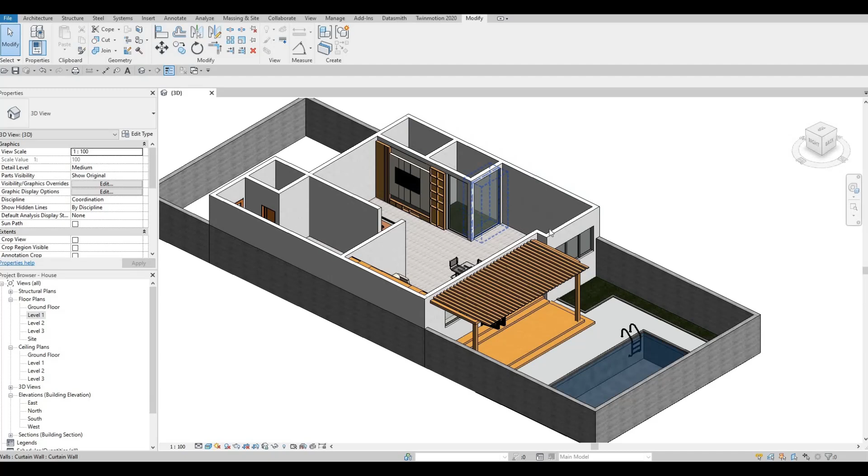So in the last video, we were able to create the pergola. We added some windows and we added all the mullions. Now we're gonna continue working on this. We want to start by creating our kitchen.

So now let's go to level 1, and here under our level 1 I want to move our section on this side, and then I want to flip them as well so that we'll be able to see what we're working on. So I'm just adding it here and I want to see everything.

What I'm planning to do is to have basically an L shape. Fridge will be on this side, L shape. We have cabinets on top of here, but not on this side because we have some windows right here.

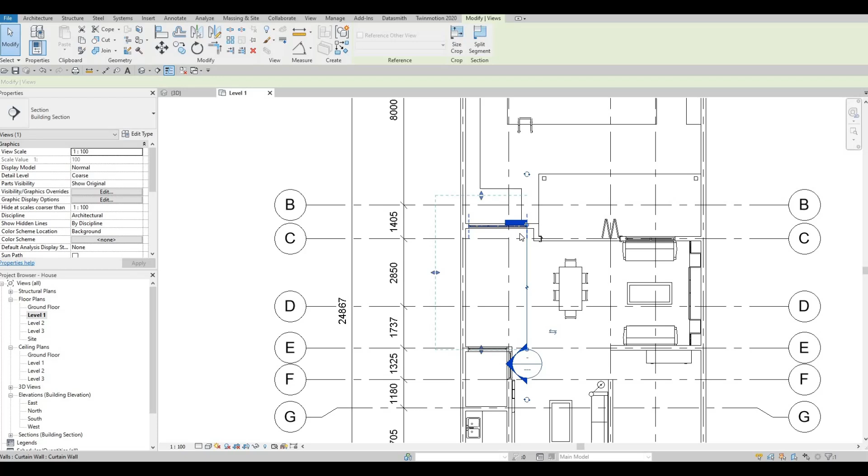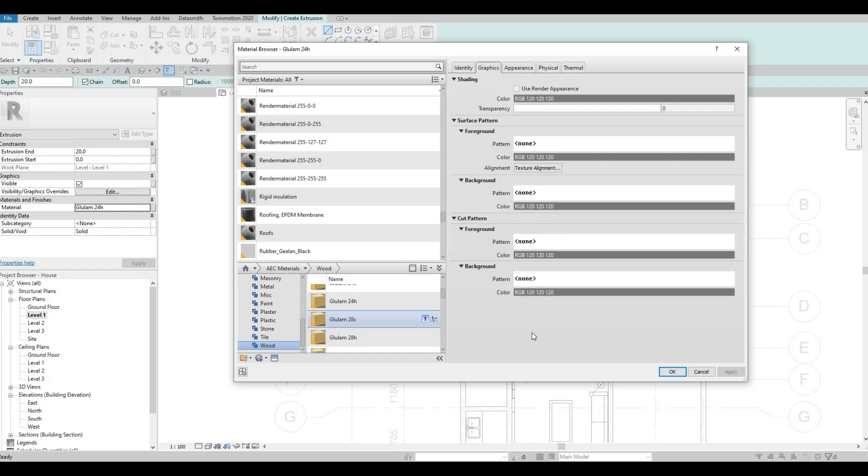So something different. So now let's go to architecture, drop down component, model in place, and then select generic model, press OK, and then OK. Click on extrusion, and we want to set this to a wood material, a different wood material. So here, let's choose one of these materials right here, 28C. Click apply, OK, and then we're going to create the base.

Here, let's set this one to 875, and then let's add an L shape right here. I'm gonna set this to around 600, and then I want to make sure to maintain all of that. So this one should be around 600 as well. I want to see 650.

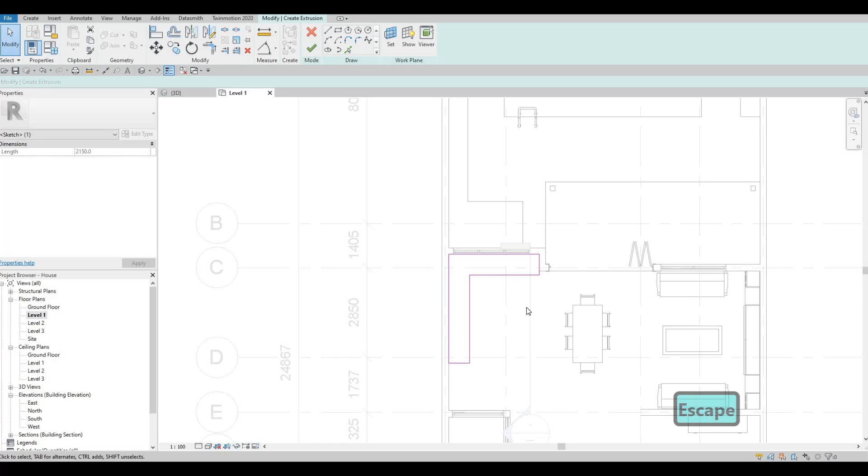I want to set this to 650 instead, and then trim and extend on both sides, and then delete those remaining right there. So 650 and then 650 on this side. So I'm happy with that. And then after that, click on finish, look at it in 3D, and it will look like that.

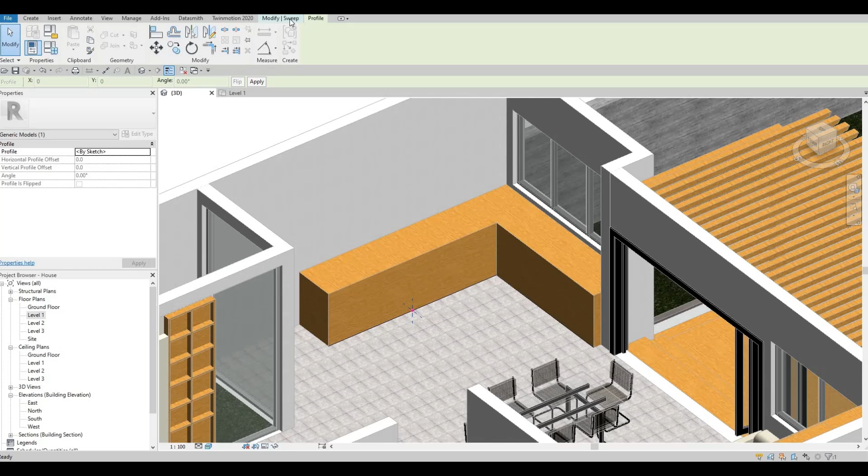Next thing we're gonna do is we're going to add our kick plate. So we're gonna use a void form and then sweep. Pick path, select here and select here. Click on finish, and then click here again, edit profile, and then select this rectangle.

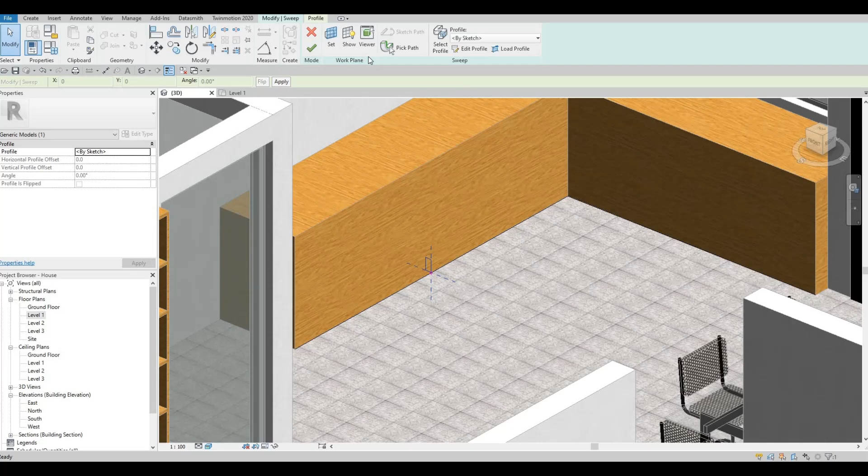We're going to put this one right here. This one is around 50, and then this one, make it 100. So that's our kick plate. Click finish, and then go to modify again, and then click finish again, and then click on cut geometry. So now it's cut. As you can see right there, we created our kick plate.

Next, I'm going to go back to level 1 and select this to add in our top. So here I'm going to select extrusion, set, and then once you click that, we're going to add, so I'm going to use pick line, and then after this I'm going to set this to 25, and the material should be a stone material.

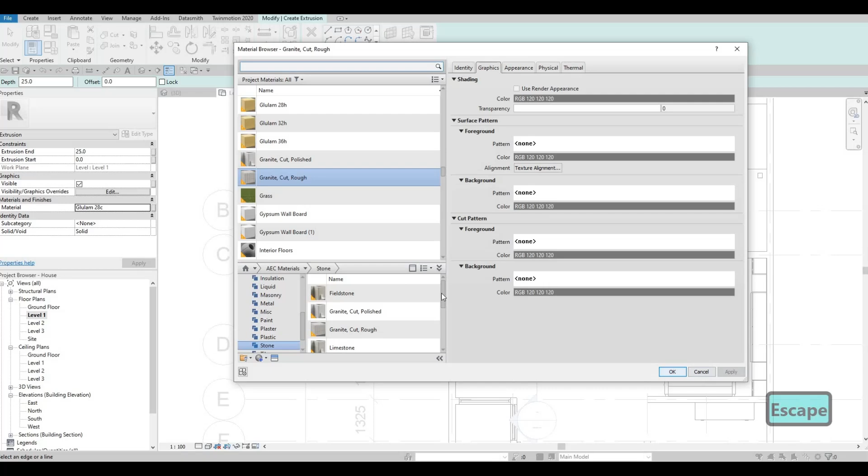This one we already used, so I'm going to use this one. Click there, and then as you can see, I need to set this one properly again. So edit, pick a plane. I'm going to use this plane. There we go. And as you can see, we have our countertop.

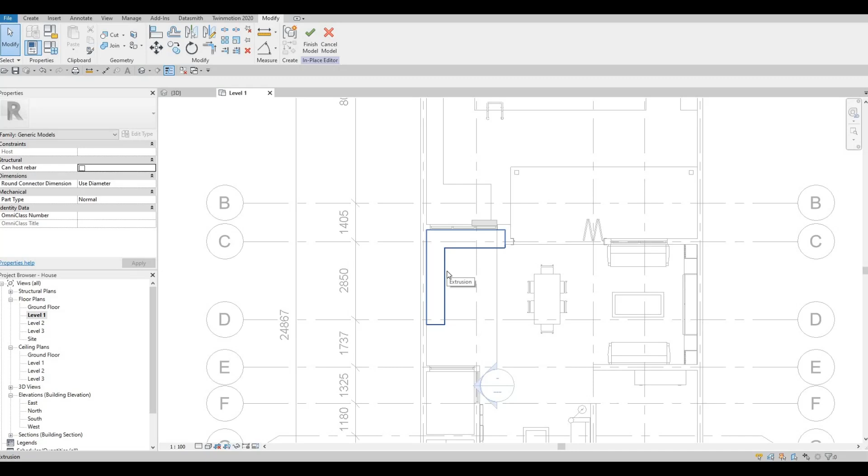And then next thing we're gonna do is we're going to add the sink. So what we're gonna do is go to insert. So before we do that, let's click on finish first, and then we could edit this later on. So here, go to insert, load family,

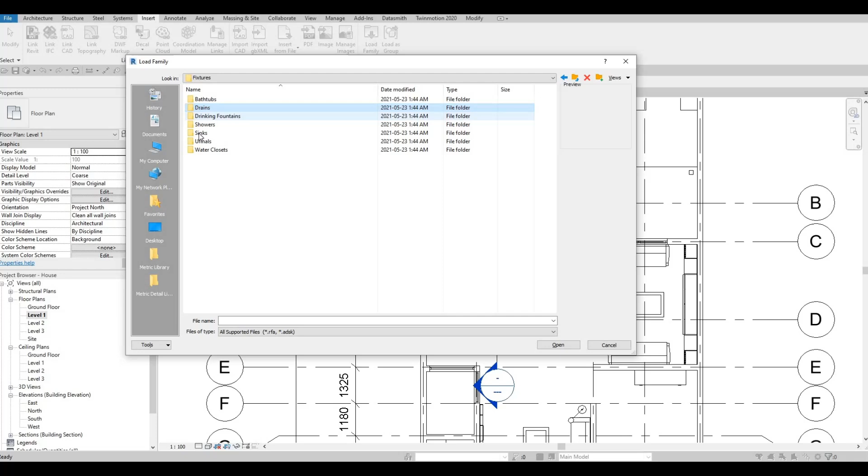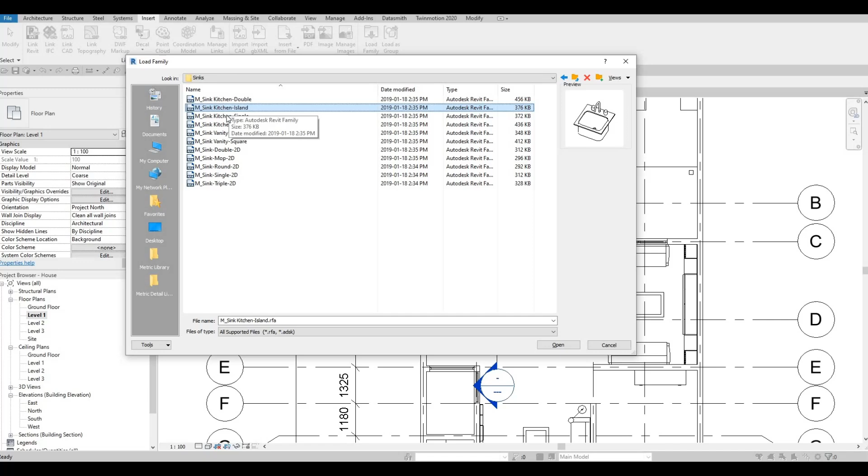and then here we're going to go to plumbing, architecture, fixtures, and then select the sink, and we're gonna choose one of these. And then I'm gonna choose this one instead, or maybe the one for the island. So just a small kitchen. Oh no, I'm gonna choose the single. Click on open, CM, and then I wanna select it on this side.

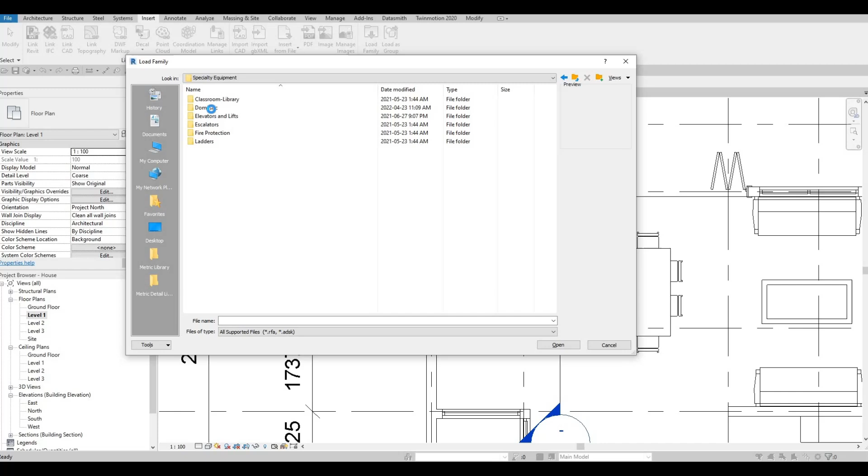And since we're here already, let's add in some of the furniture or equipment. So specialty equipment, domestic, mid-range, and we're going to add in the fridge.

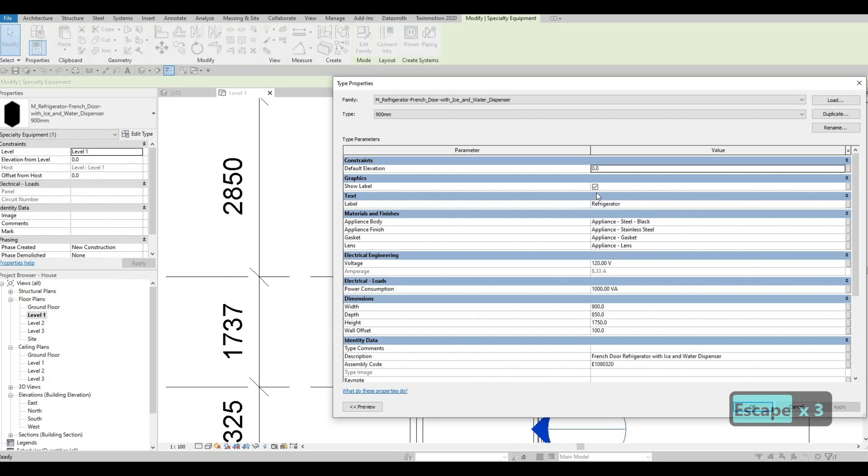So I'm going to use this, click open, type in CM to add it instantly. And then here, I don't want my label to show. Click apply, okay. And then let's align all of this, AL. Let's move this first so that we could align it properly, AL, and then align it there.

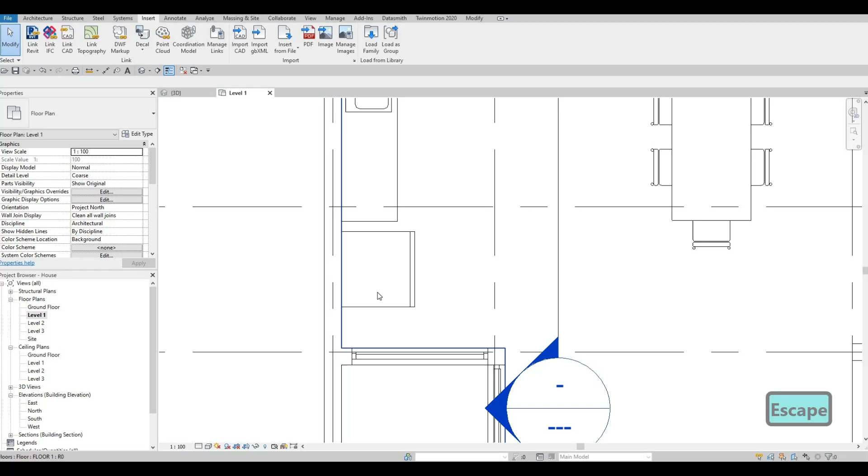And of course, we're going to create a case here. So actually, we shouldn't align it. Let's just align it at the back, which it's already at. So I'm gonna create a case here for this. But I want to change the depth to 650 as well, so that it looks nice enough on this side. So we have enough space,

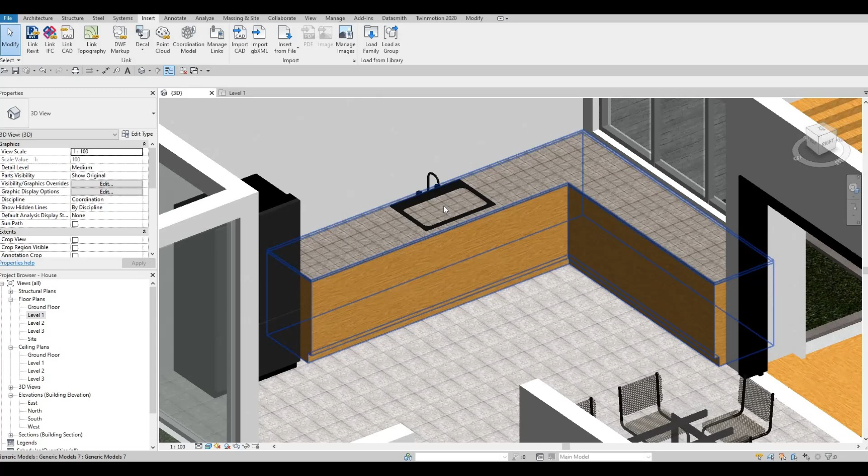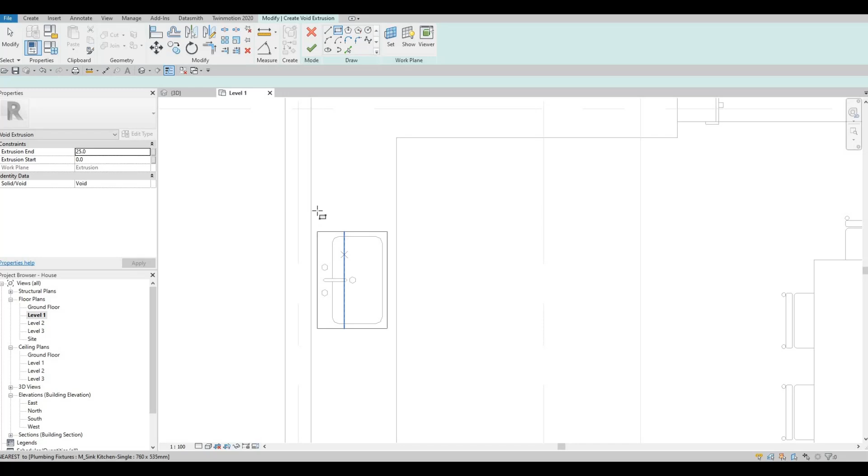and we still have this one still visible. So as you can see, we need to void this one as well, because right here we need to edit again. So go to level 1, edit, and then here we need to void extrusion so that we can see the sink here. So rectangle, we need to set it, pick a plane, and then let's select it right here. After that, let's just give it some space like this.

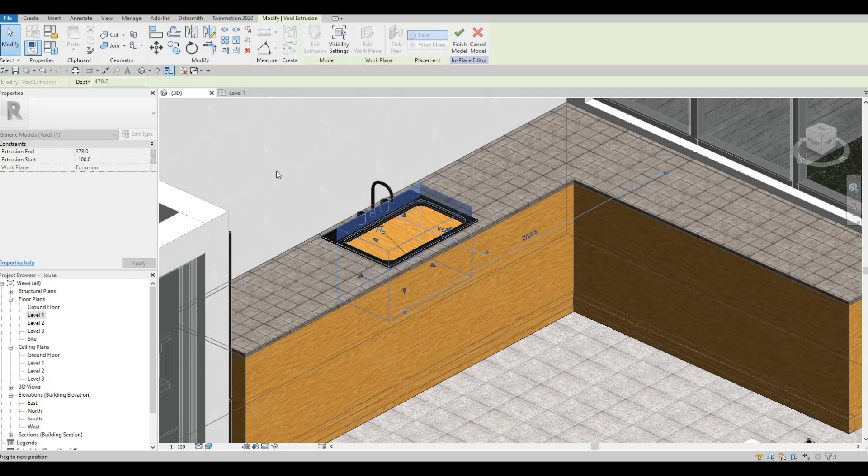I want to make sure that I don't touch this because I don't want it to be flashing. And then here, as you can see, we have our extruded part, but it's not extruded too much. So I'm going to extrude it going down so that we could see this one. So cut geometry, and as you can see, it's showing now. So that's how you do it, like that. And then we're going to create an island. So that's the last thing that we're gonna do.

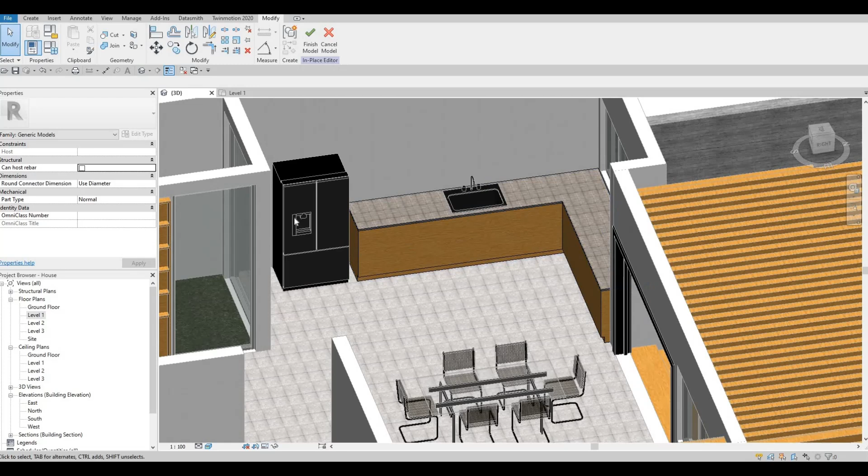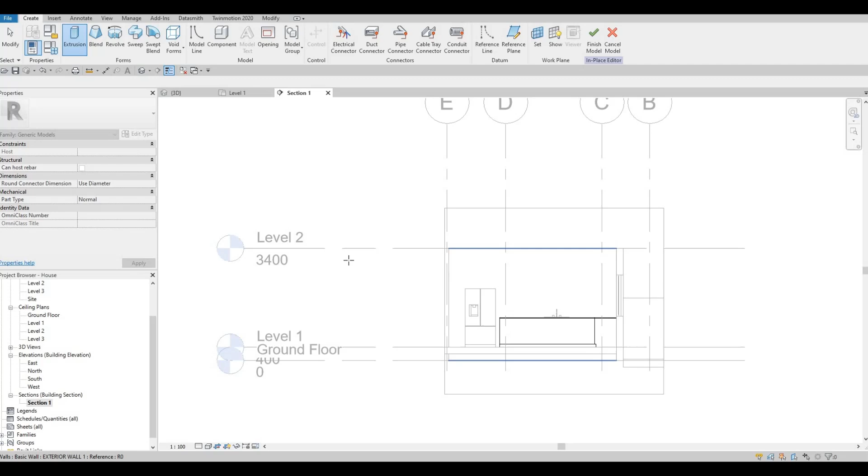What I'm gonna do next is to maybe add something right here. So let's do the section. I want to make sure that we have the section open, and here let's create an extrusion, pick a plane, and then select this wall, and then here we're going to change it to a different wood material, maybe 36C. Apply, okay, select this one and create an opening right here.

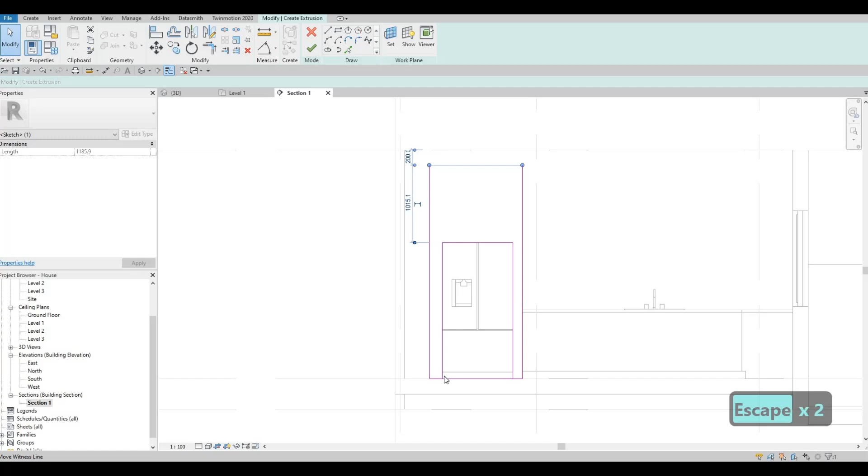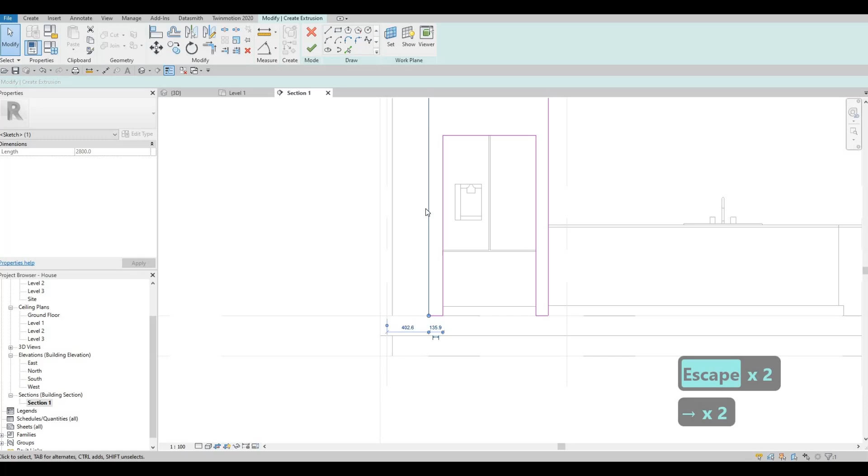And then this one should be all the way to 2800 only, so that's perfect. And then delete this, and then SL on this, and then TR, trim and extend. Click finish, see it in 3D, and then let's just push it out like that. And then let's go to level 1. I want to see how it looks. So it looks good.

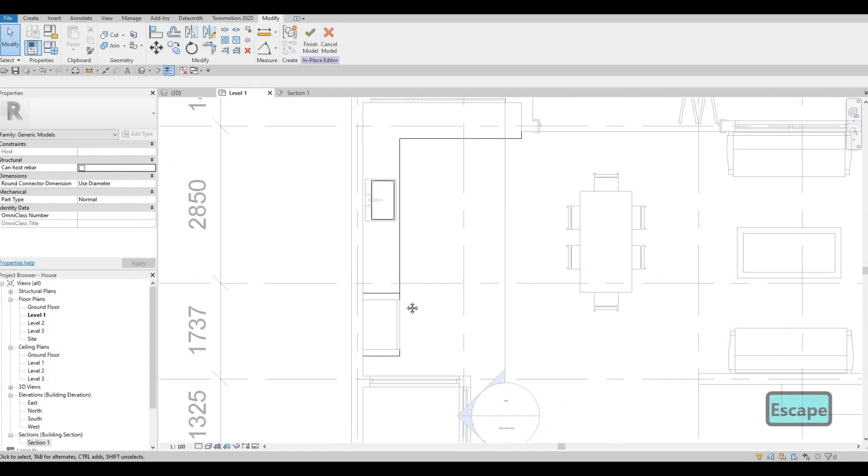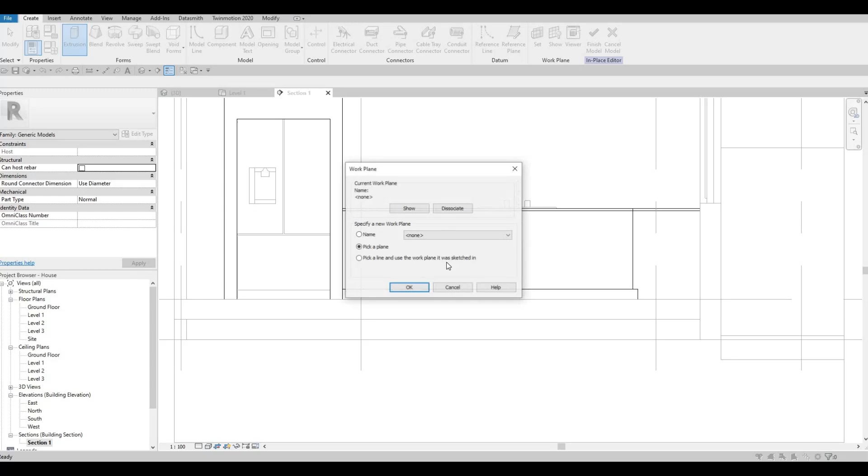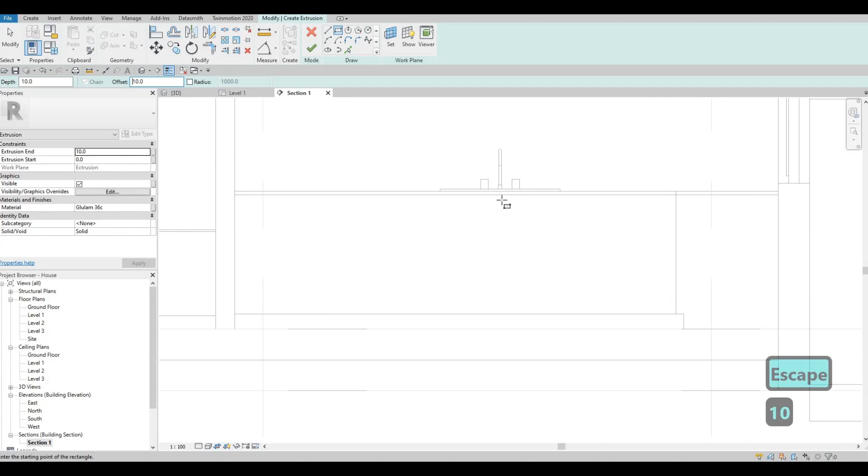And here we need to add our cabinets. So I want to see what material we'll use here. See, Control C, go to section, and then let's start adding those ones. So here I'm gonna click on extrusion, pick a plane, and we're gonna select it here. I want to have an extrusion of only 10 because it's just the kitchen door. And here I want at least to offset this to 10 as well, so that we have some gap going inside like that.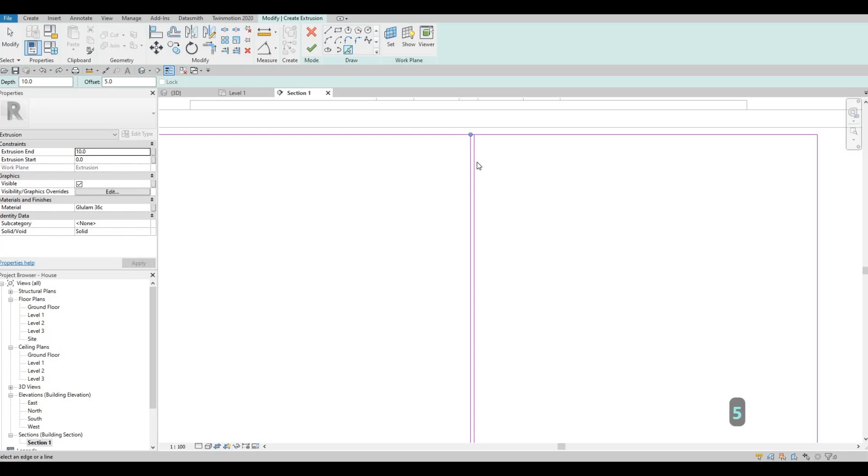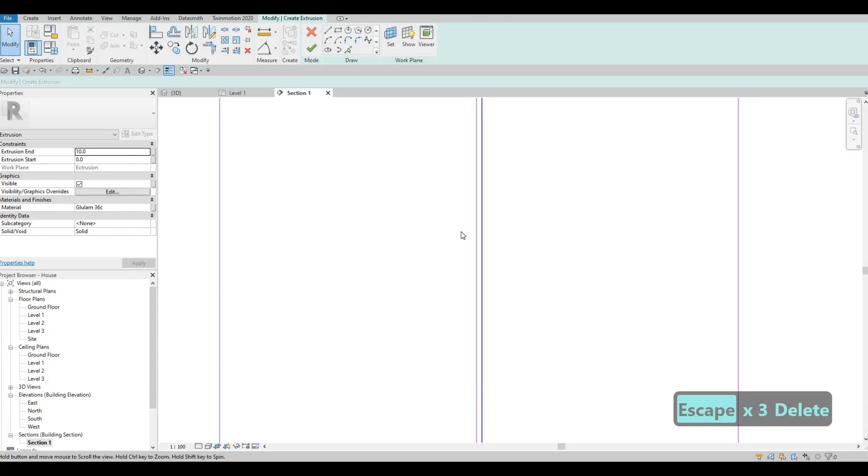And then might as well mirror this. And then here we could just move this one, or just delete or offset this to 5, and then delete the one in the middle, and then another one. So we have those that we could create SL on that, and then SL right here, trim it. This one should be deleted, and then trim it again here, and then delete this part. So now this is looking good.

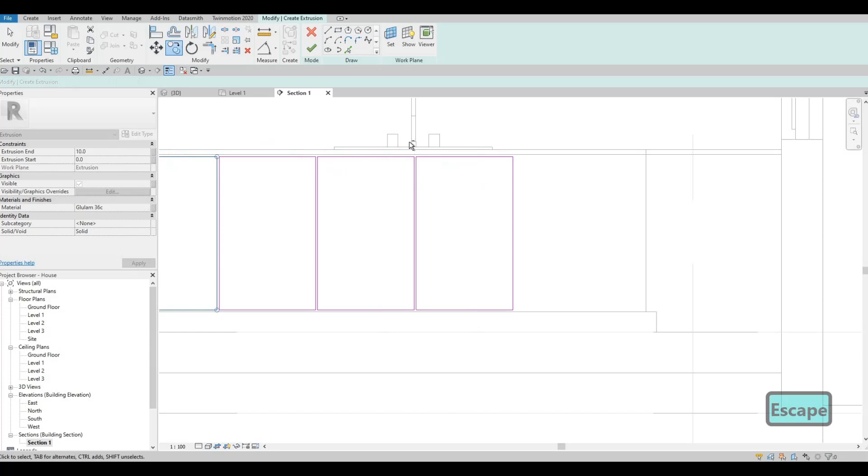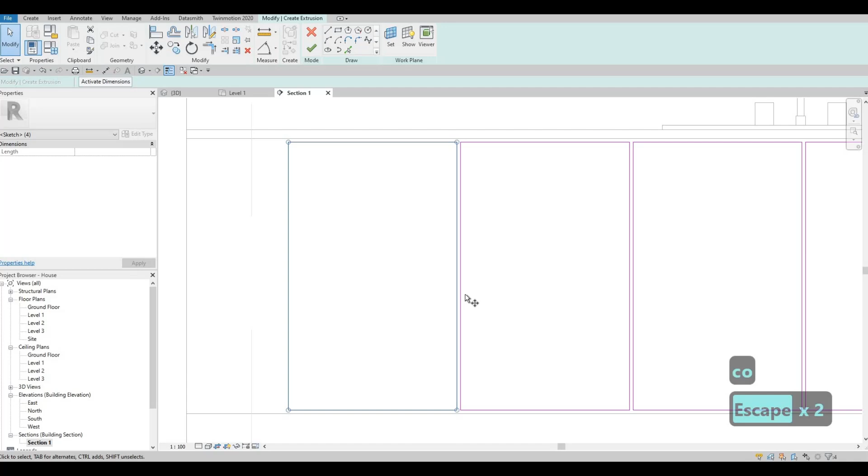We just need to mimic the spacing, copy it, and grab it from the corner. And then we're gonna do it on this side as well. CO, grab it there, so that we don't need to keep on creating the split element. CO there, I don't want to touch that, so CO, grab it there, and move this one. And you want to make sure that you have the correct spacing.

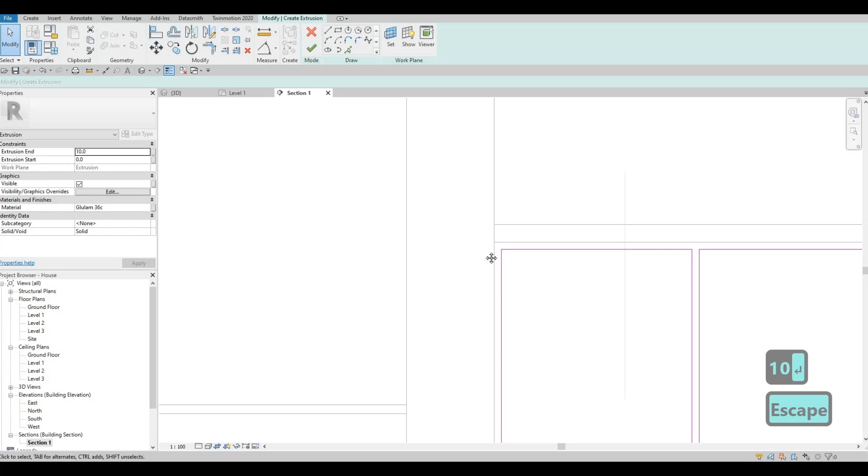Let's use this, and then put 10. So that's good on that side. And how about on this side? Let's fix this as well. CO, and let's add it on this side as well. Obviously, it's not all hinge doors. We have drawers as well. So might as well add those drawers as well right here.

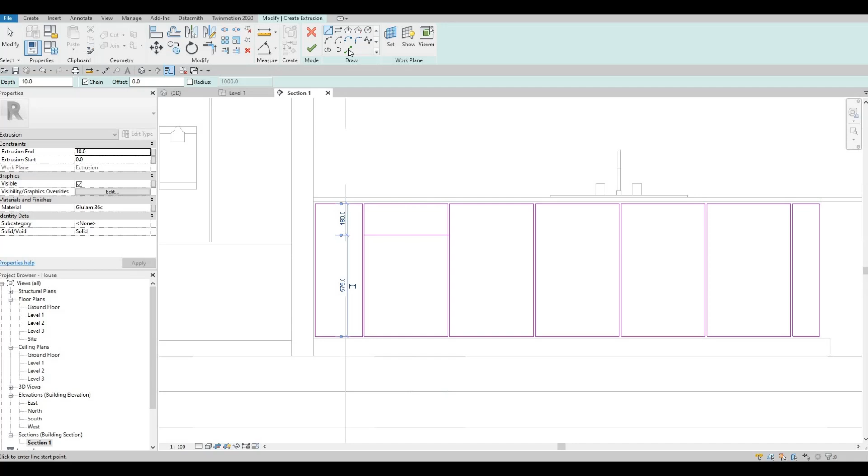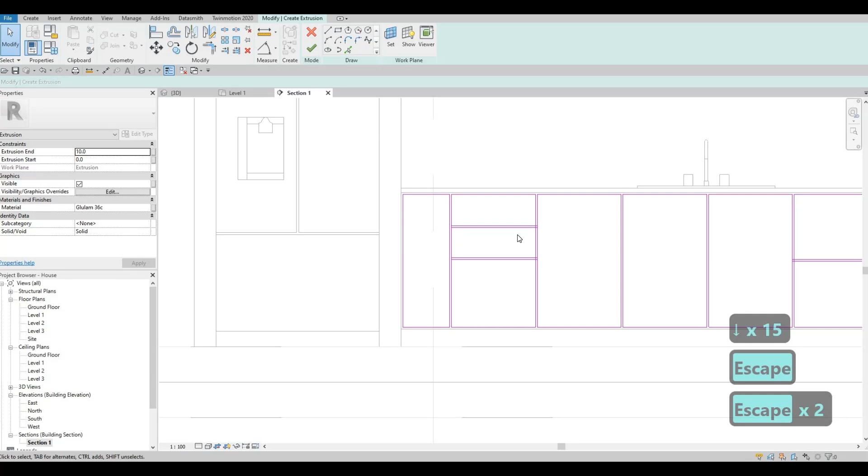Offset it to 10 and copy and grab it. Put it on this side, so to change it a bit, make it equal at least. And then now SL, and then SL. You just need to split it, and then TR, trim and extend, unjoin them. So this one we need to SL as well.

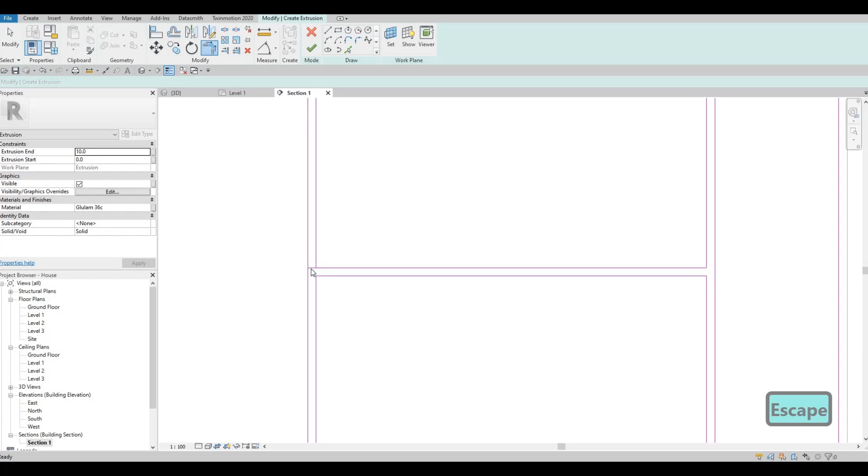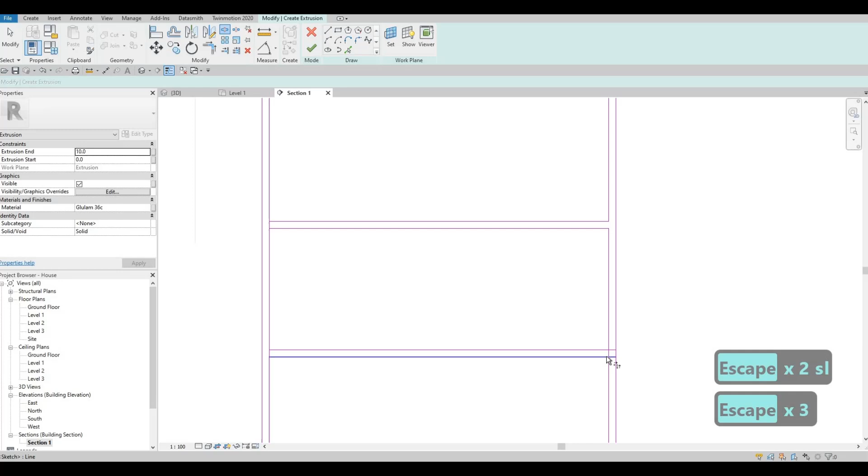This one is an extra, so we could just delete. Trim and extend. We need to SL on here, and then this will be extra. Trim and extend, and those are extras. This one's good. Okay, and then now Glulam 36. See, that's fine. So we're gonna do that on the other side as well.

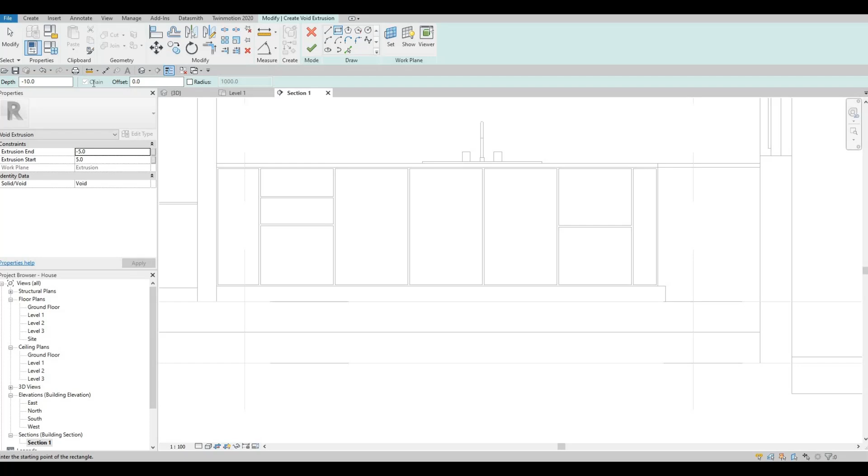Go to 3D, and we have something that looks like this. I want to add more detail, so what I'm gonna do is select that again, right here, void form, void extrusion instead. Pick a plane, I'm gonna choose this plane, and here I'm gonna put -5 and then 5, and then here we're going to offset this to around 50 and just simply add this information right here.

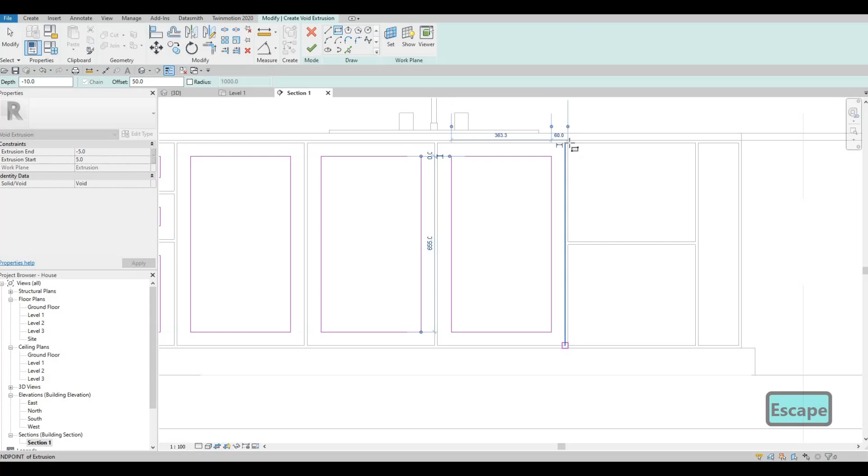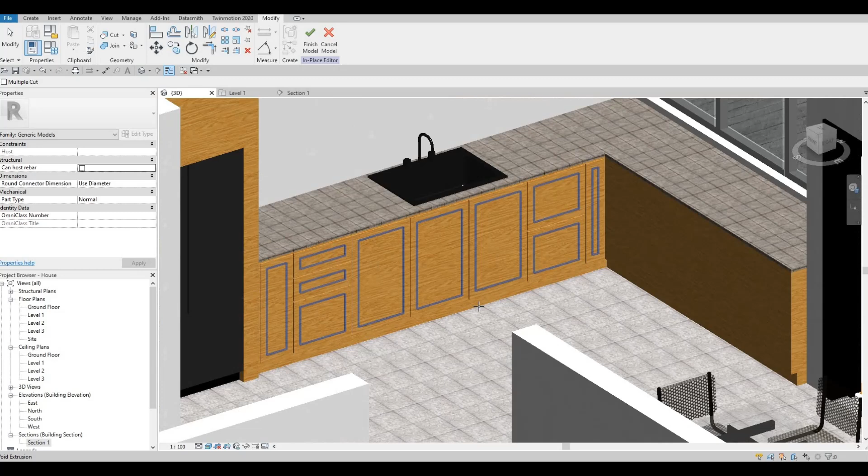This one will make it look really good and look really modern. Click on finish and click on cut geometry, and as you can see, it really looks good. Simple, but as you can see, a big impact in the way the kitchen will look.

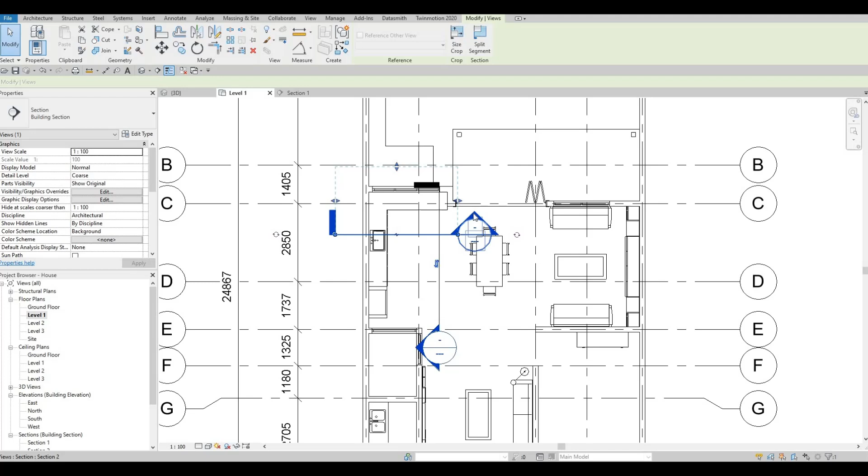So next thing we're gonna do is just click finish, because what we can do next is go to level 1 and add another section here so that we could see it much better. So I'm going to flip this on this side, change the view range, and then just double click so that we have our section 2 right here, and we could just move this one on the side.

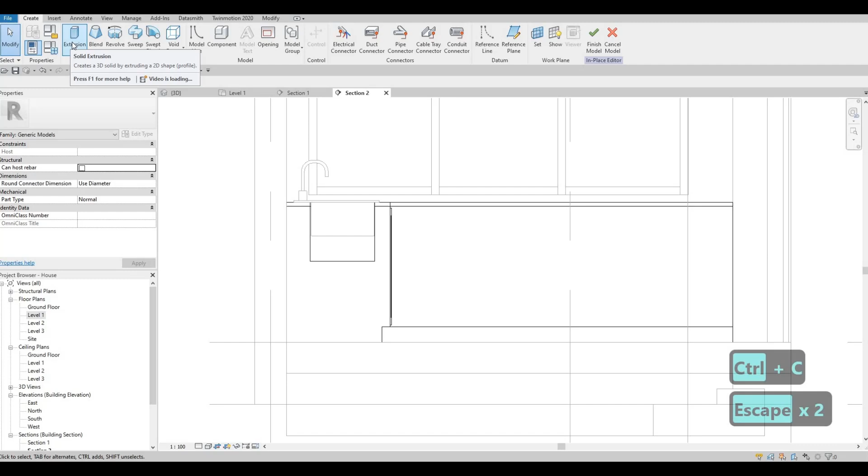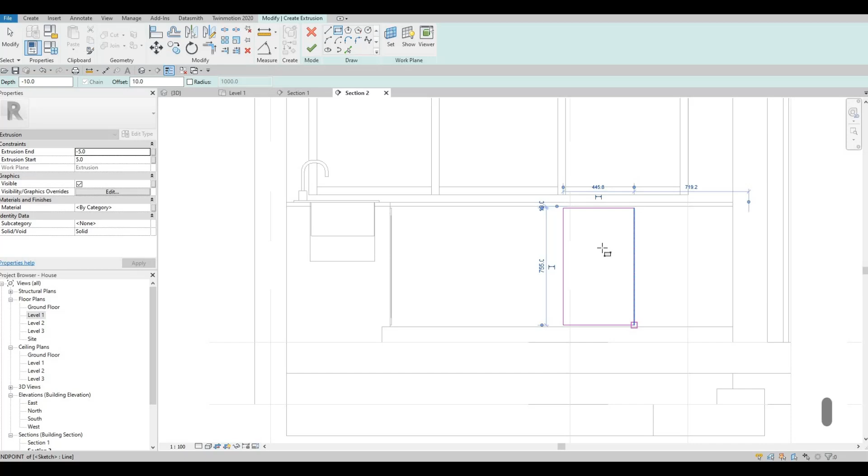So now I'm going to select this, edit. We have Glulam 36, so I want to make sure this is the same material that I'm gonna use. Click extrusion, pick a plane, and what I'm gonna do is click right here, select, and then offset this to 10, and might as well put it in the midpoint, flip it, and I want around 450 instead, and then copy it,

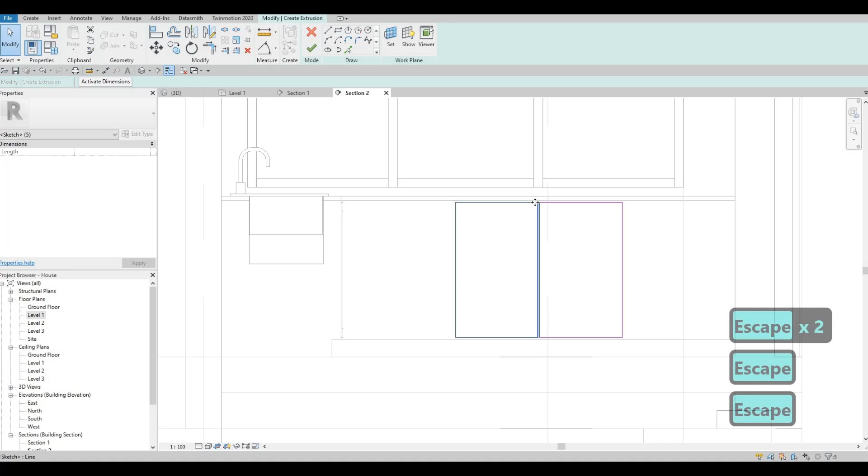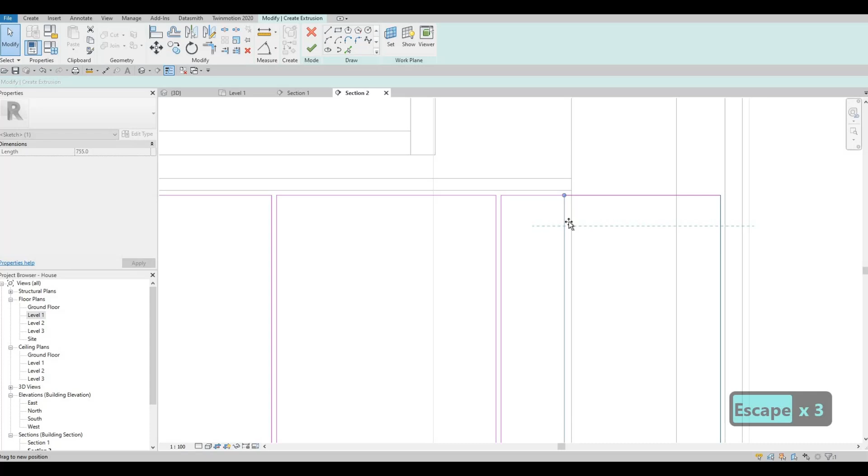select, and just move it. 10 is perfect, that's the way I like it, and then just copy, select this, copy, and then put it right here on this side, and then another one on this side, copy it again, put it on this side, and then lastly on this side. The ones at that end, you just need to make it going inside, and then we're just going to leave it like that,

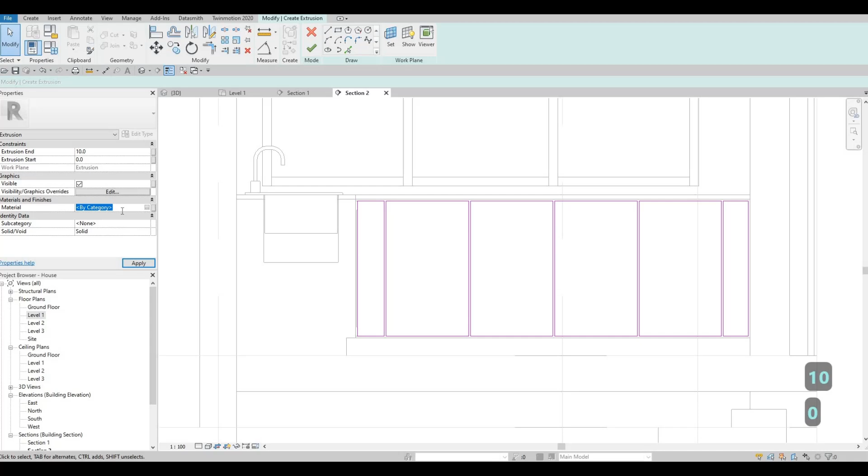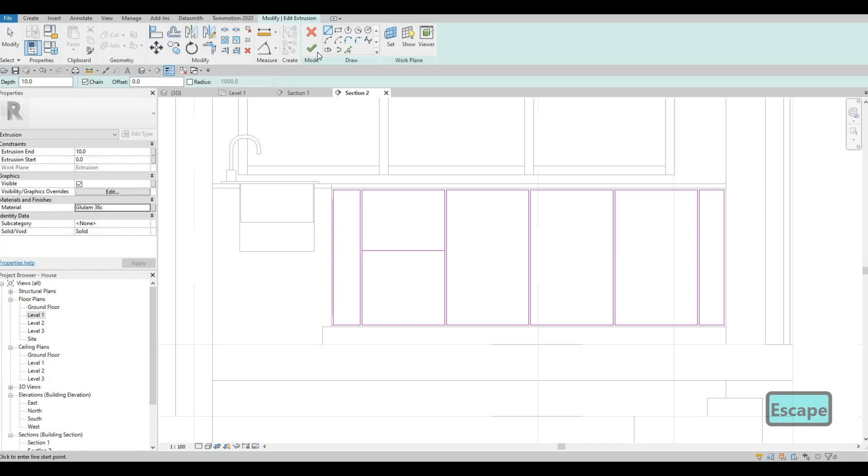and here we just need to change this to 10 and 0, and then here Glulam 36c, click apply on that, and then click finish. So we have all of those. Also what we could do is edit again. I want to add some drawers as well, so similar to what we did, we just need to add 2 up here, or maybe another drawer, and then offset this to 10,

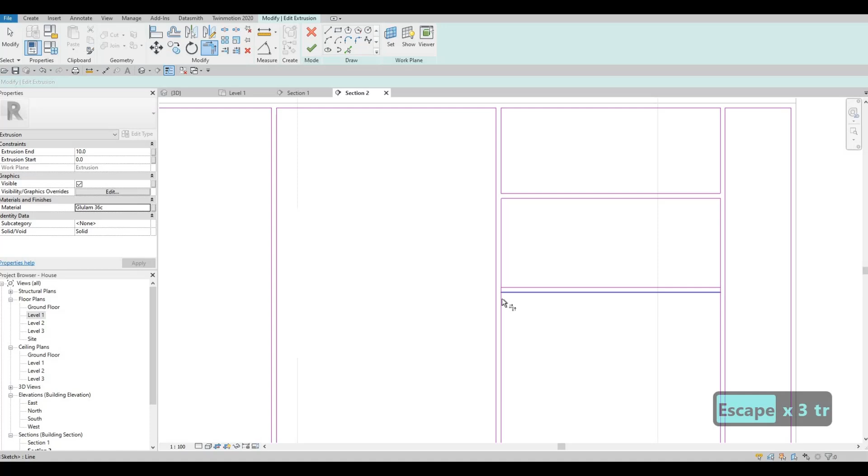and then right there, and then SL right there at the top, and then now trim and extend. And then trim right here on this side as well. And then we have something that looks like this, but we're still not ready because we can void this, void extrusion, pick a plane, select this, again -5, and then put 5 right here to apply.

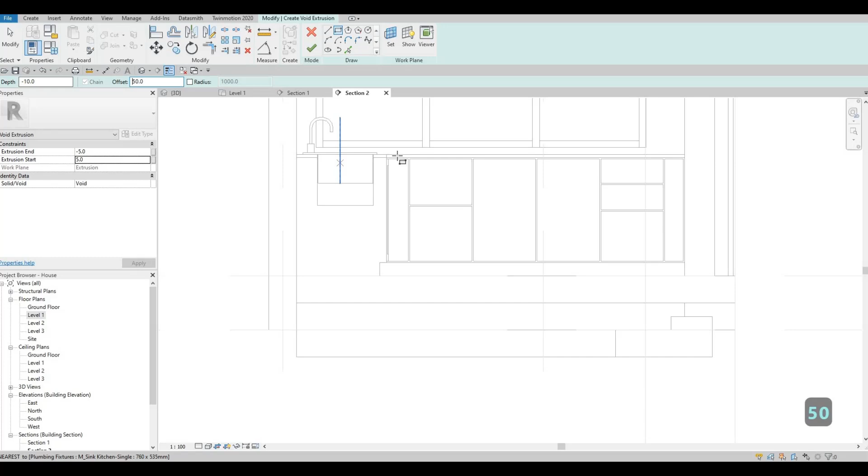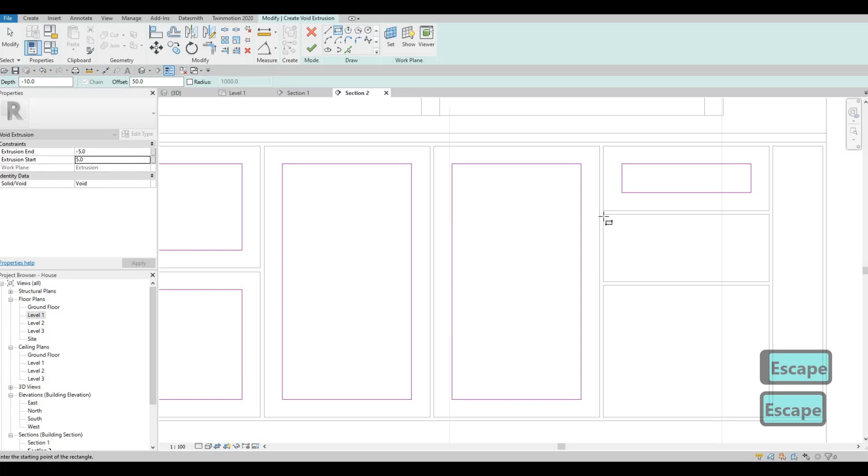Use this, offset 50, and then click right here, and then just select the edges. Use spacebar to change the orientation of the offset. Okay. And then we just need to finish up. And there we go. So click on finish, and then cut geometry, and then finish again, and look at it in 3D. So we're gonna stop here for now and continue in the next video.